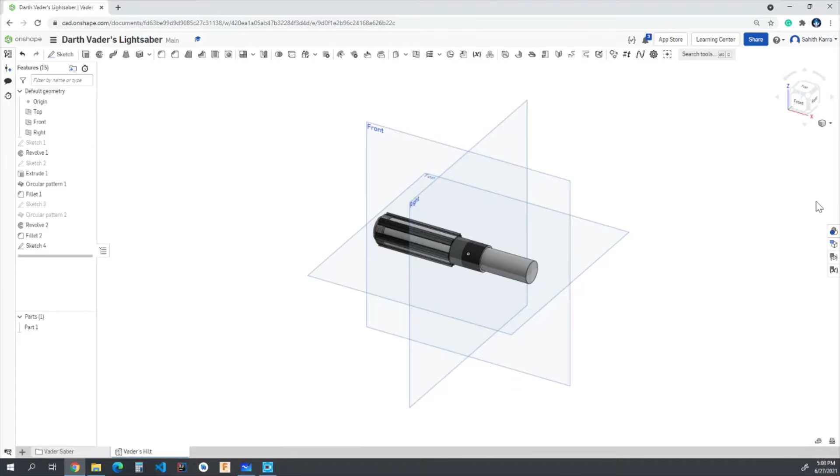We're going to come on over to the front view and create a new sketch right on this front view, and just add a rectangle right at the bottom, right underneath this black section.

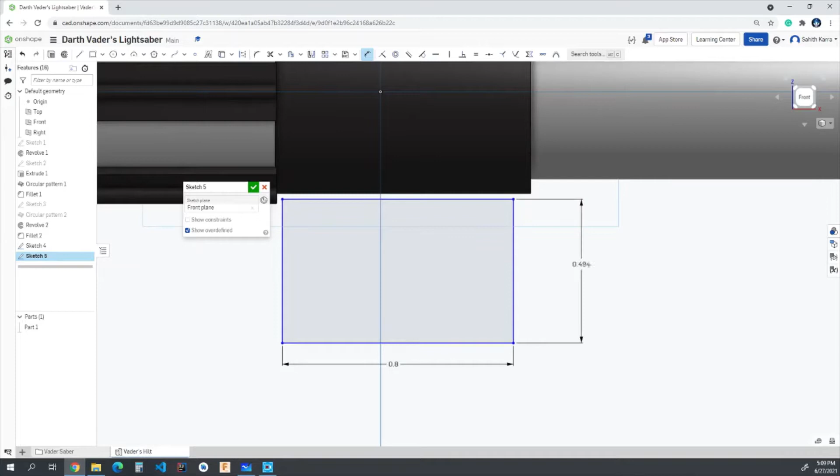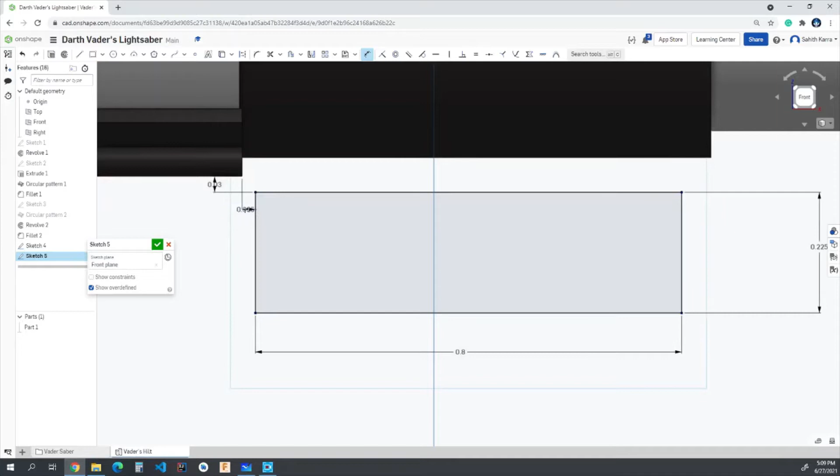We're going to add our dimensions. This bottom edge is going to be 0.8 inches, and this side is going to be 0.225 inches. Then we have to dimension the locations of it. This is going to be just right off of this bottom edge of this little notch over here, 0.03 inches, and then in terms of its horizontal dimension we have to add this in, it's a little weird. This will be 0.025, and just like that we have our little rectangle.

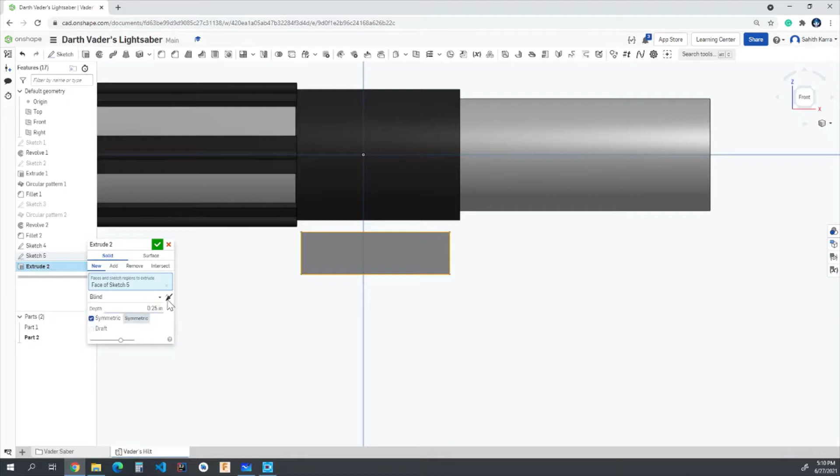Hit OK on our sketch, and we're going to move on to the extrude. We're going to extrude this little rectangle we just created, and the depth is going to be 0.25 inches. Momentarily we're going to be creating a part 2, but we'll deal with that in a sec. Make sure you have symmetric clicked, and once you're done with all that, hit OK.

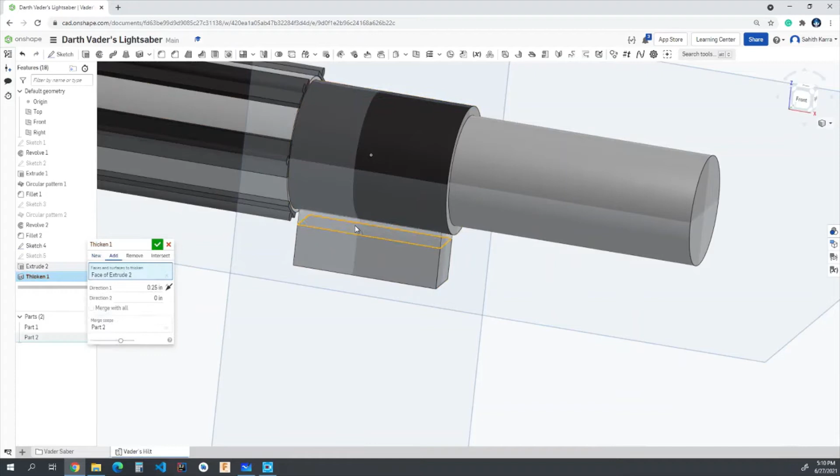So basically what we're going to be doing is creating a little handle for Darth Vader's lightsaber. We momentarily created a second part, which is just this rectangular prism, but we want to add this little bottom face and attach it to the top part. We're going to do that by thickening it so it attaches back, and we want to merge it with everything. Once we've done that, it makes sure this part is now attached to part 1. I'm going to hit OK.

For both of these little extrudes and thickens, I'm going to add an appearance and make it the custom black color that we created in part 1. I'm going to hit OK, and like that we've added this little second part.

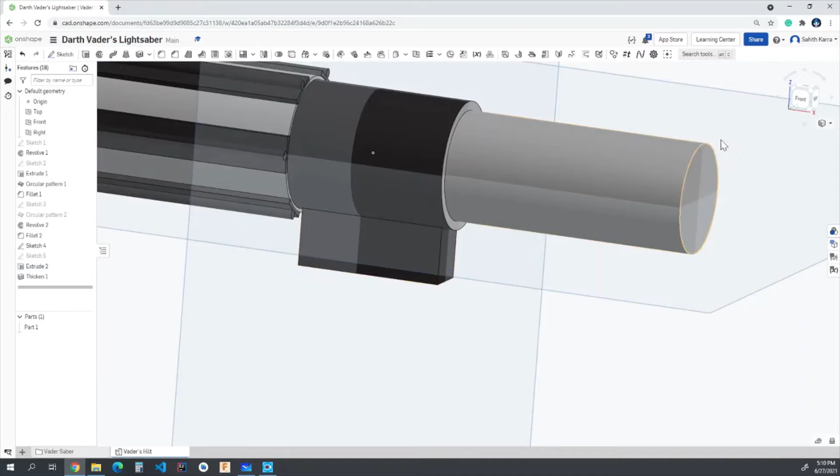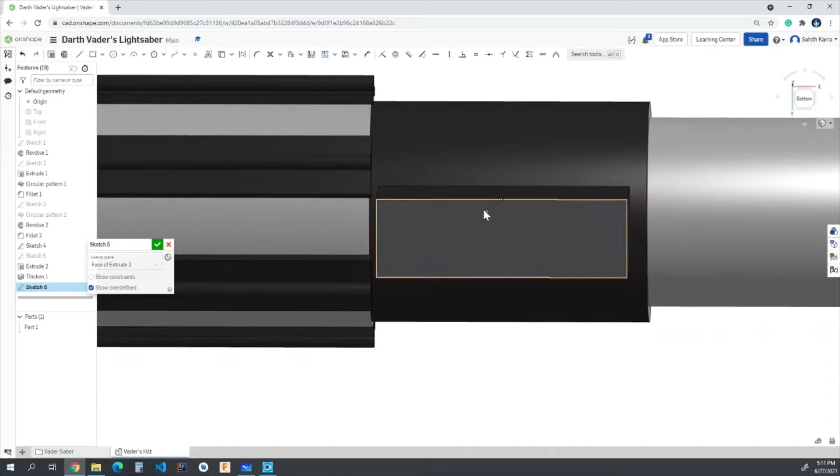Then we're going to come on over to the bottom of this handle. I'm going to hit P on my keyboard to make all the planes disappear again. I'm on the bottom now, and we're going to add some circles, some buttons and other details to this handle, because right now it's kind of boring, so we got to add a little bit of detail to it. I'm going to do it on the bottom part of this rectangular prism, and add a few circles to it.

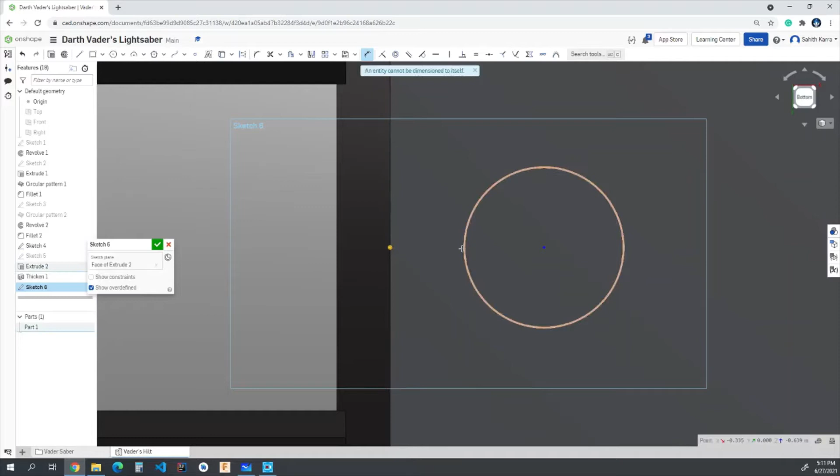First I'm just going to start off with one, making sure it's aligned with the midpoint, and add that circle in right there. Let's move this out real quick so we can dimension it a little better. Let's dimension this like so. This is going to be 0.01 inches—right, and that just blew up, so let's go ahead and change this to 0.115 inches. Alright, and that's exactly what we're looking for.

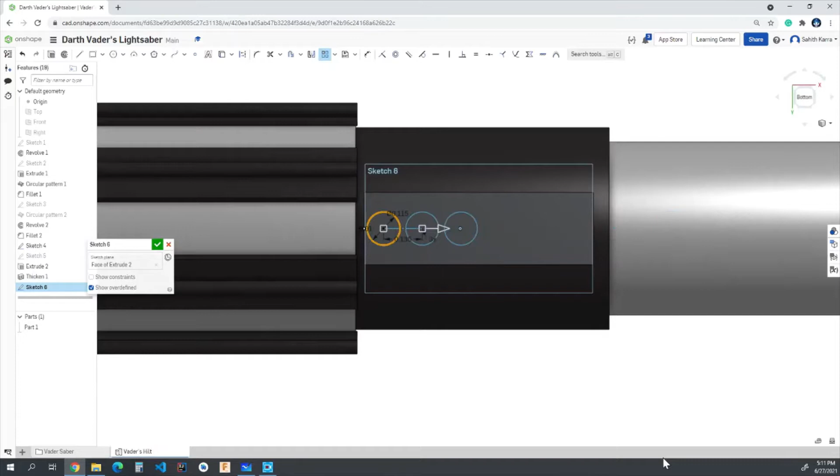Hit OK. Now we have to make these buttons—right now they're just circles. We have to make these 3D objects, and the perfect way to do that is through an extrude. So I'm going to extrude sketch 6, and we're going to move this up 0.03 inches.

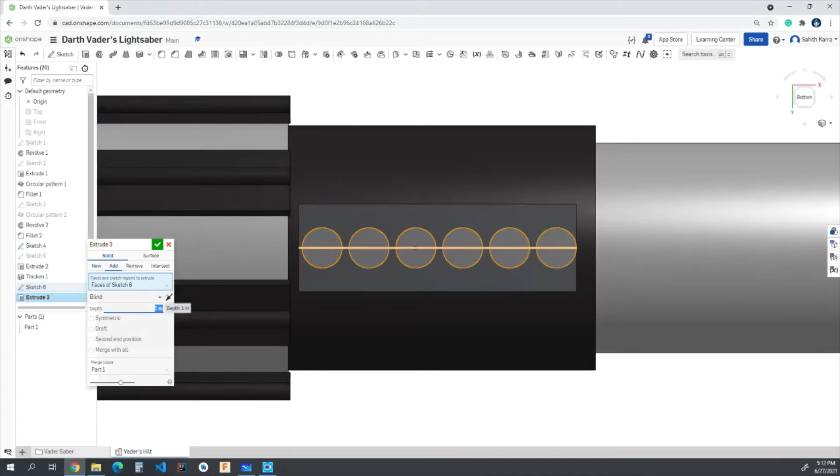And like that, we have 6 little buttons right there. But they're kind of sharp. We want to make these more smooth, and the perfect way to do that is through fillets.

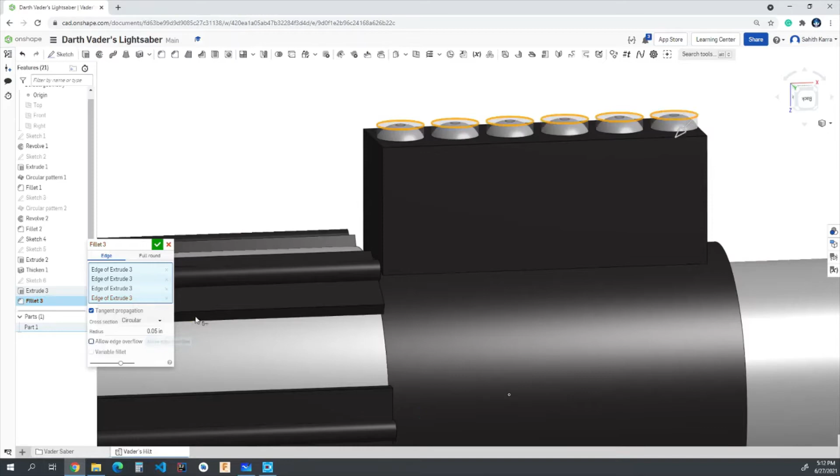I'm going to hit all of these little edges on the top of our buttons. For a second it's going to show up as red, but we'll fix that. We want these fillets to be 0.05 inches, and we want to remove allow edge overflow, which should fix all our errors. Now we've got 6 round buttons, and that looks pretty good.

Now we're going to come over to the front view and add the final notch on our handle. That's going to happen on this little front part of the handle that we created. I'm going to come over to the circle tool and align to the center.

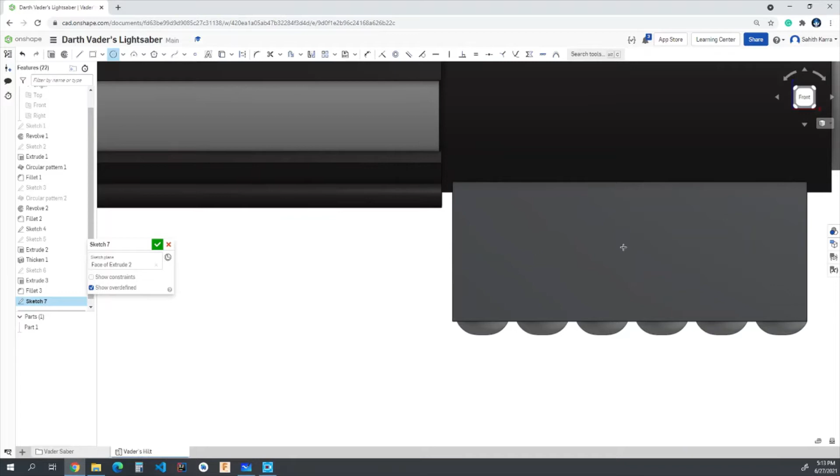Onshape makes this easy for us. We're just going to hover over the top part until we see the midpoint, hover over here until we see the midpoint, then drag over, and Onshape will know we're looking for the center by highlighting the 2 things in orange. I'm going to create a first circle, 0.1 inches, and a second circle, 0.15 inches, and like that we have 2 circles.

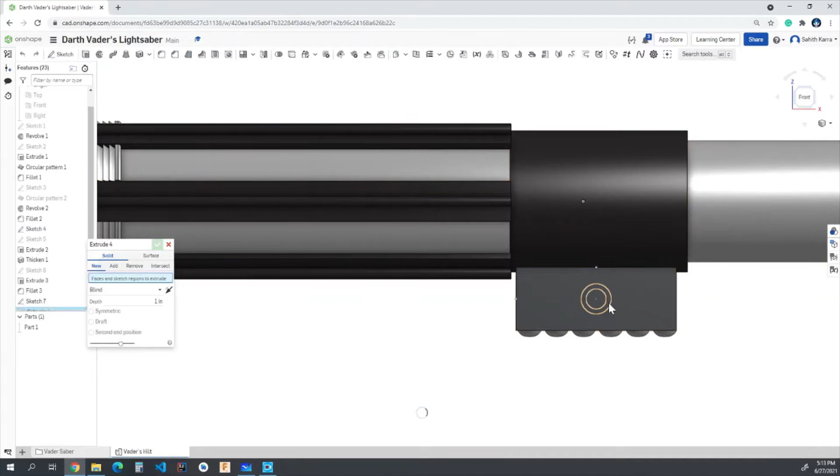They're going to be the blueprints of our notch. I'm going to hit OK and move on. Then I'm going to extrude this outer ring of our two circles, this outer section, 0.25 inches. Once we've got that, that's our little outer circle for our notch.

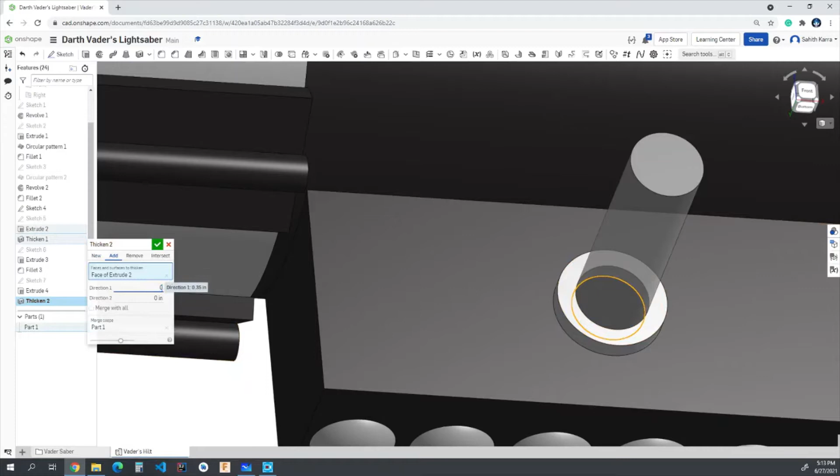Now we want to do the middle section. I'm just going to hit thicken on that little center section. Let's make this, instead of 0.35, 0.15 inches. Hit OK, and now we're almost done with our notch.

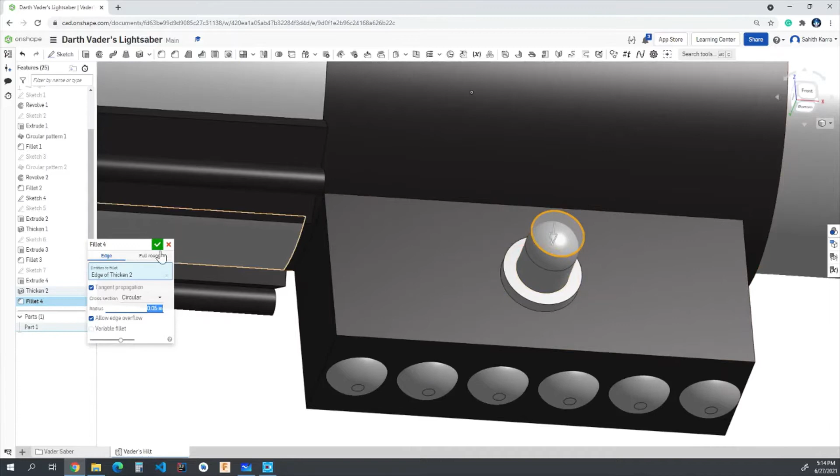Once again, we just have to make the top part smooth with a fillet. We're going to hit that top section and add a fillet of 0.05 inches. And like that, we just smooth it all around and create a really nice looking notch. With that, we've added our middle section details to Darth Vader's lightsaber.

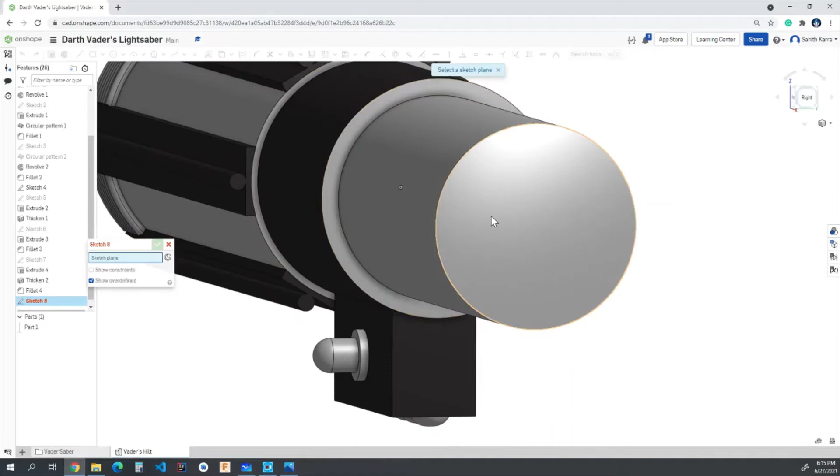Alright, now let's begin working on some of the upper details to Darth Vader's lightsaber. First I'm going to come over to the right view and start a sketch right on this upper circle. I'm going to start with a circle right off of the origin, and let's make this 0.85 inches.

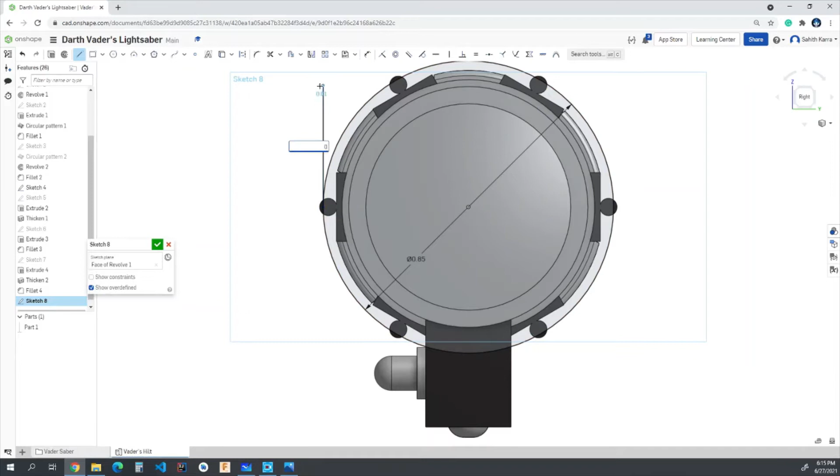Once we've got that, we're going to come over with the line tool, and we just want a nice line tangent to the circle. Let's make this 0.5 inches, and repeat the same thing on the other side, just tangent to the circle, 0.5 inches.

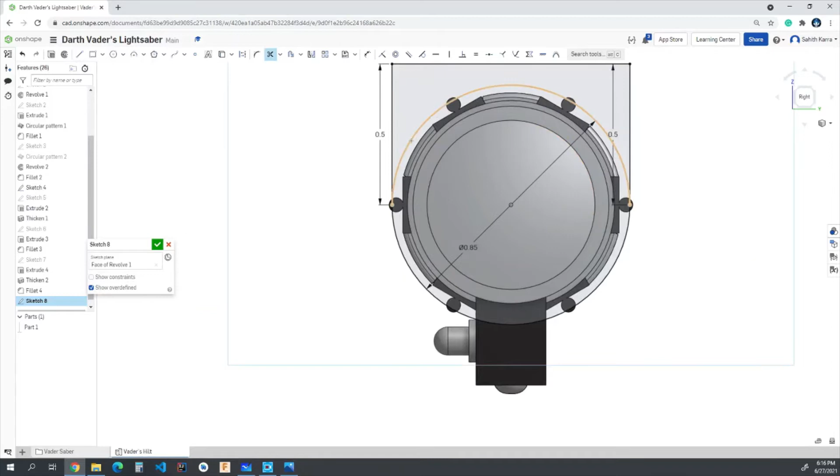Let's connect these two lines with a line that's 0.85 inches long. Then I'm going to come over to the trim tool and just trim the top part of the circle until we have this nice shape over here. I'm going to hit OK on that sketch, and then we're going to extrude this sketch that we just created.

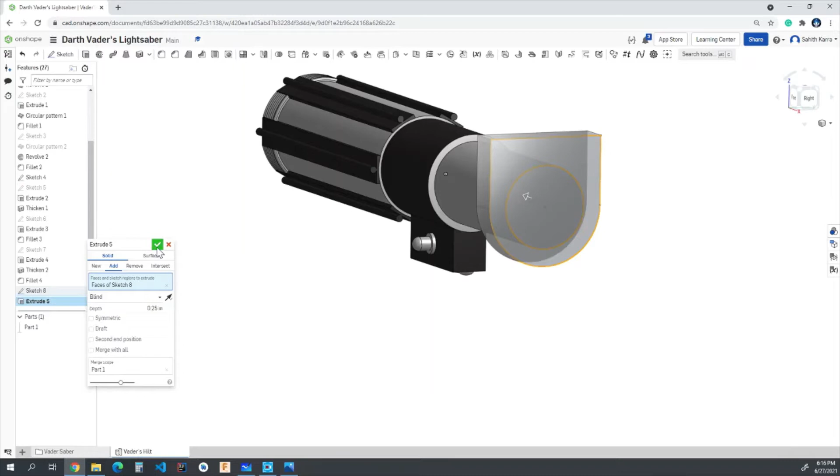Let me go ahead and click on the sketch instead. Alright, but instead of up, let's go down, and instead of 1 inch, let's make this 0.25 inches downward. Once I do that, I'm going to add an appearance to the feature, making this a custom black color. Now we have the top part of our lightsaber almost complete.

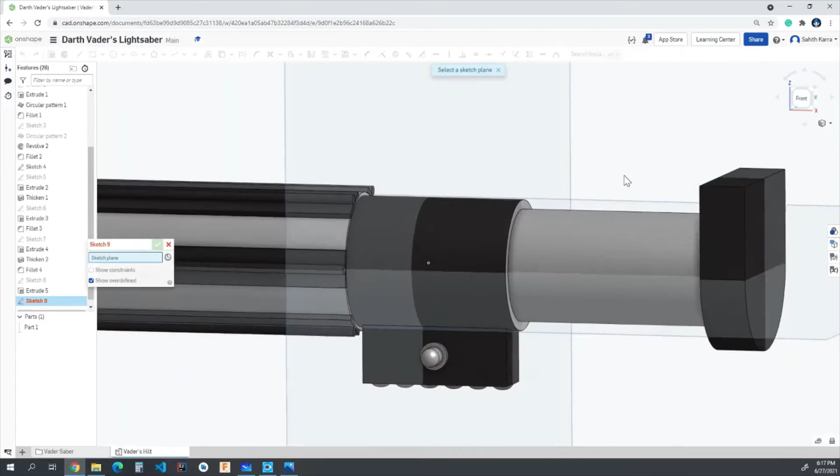I'm going to come over to the front view. I'll go ahead and add my planes back by hitting P. Now I'm going to start a sketch on the front view—or actually, instead of on the front view, let's do it right here, it'll make it easier. Right on this little face, where we created this rectangular kind of shape attached to the semicircle, we're going to create a sketch on that face.

Then we're going to create a rectangle. Let's hit the rectangle tool and start off from this bottom corner, and start up—so let's retry that rectangle. Let's actually start from this top corner and work down, making sure this is a corner rectangle. Let's start up over here and make this rectangle again. The first dimension should be 0.225 inches, and the second one should be 0.3 inches.

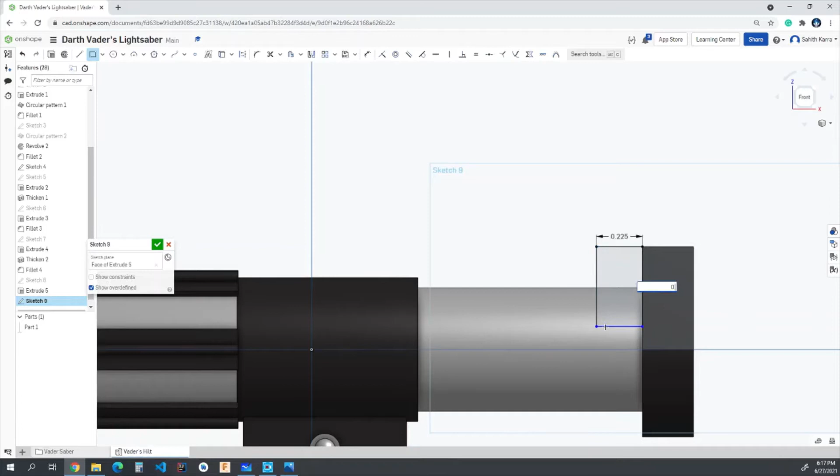Now once we have that rectangle, I'm going to come over to this—should be the 3-point arc, that's the one. We'll start off from this bottom corner and move our way to the top corner, or not top corner, but the corner over here. And let's make this 0.2 inches.

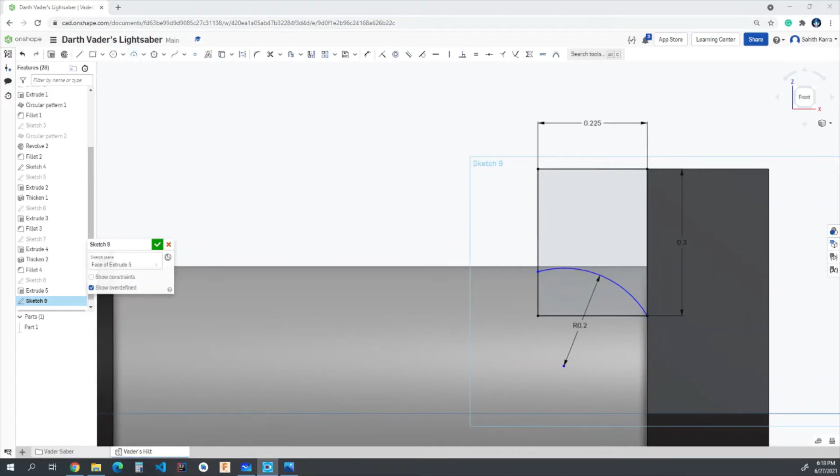Alright, let's go ahead and make this dimension 0.225 inches. Perfect. Now we're going to hit OK on this sketch, and come on over to extrude. We're going to extrude this face backward again, and let's add this to part 1 by merging with part 1.

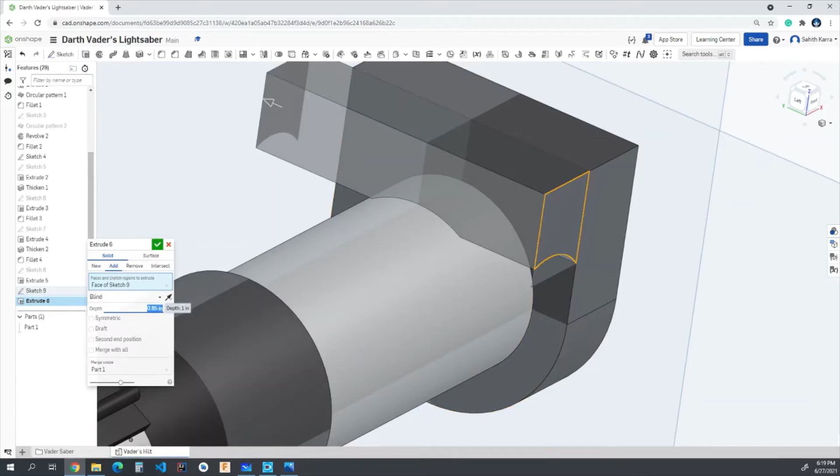This extrude should be 0.85 inches long, just the same length as before. Hit OK, and that's already black, so that's perfect. Let's lose the planes again, and now we have this little other section of our lightsaber. It looks pretty good so far.

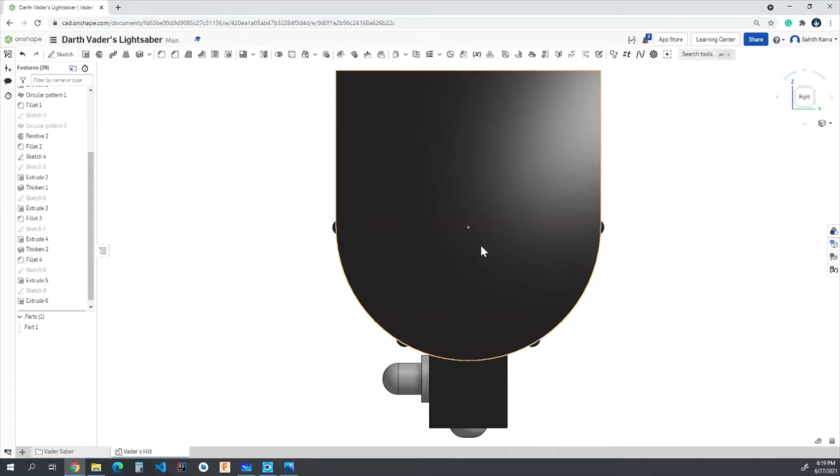Now I'm going to come back onto the top, hit right on this little cube, and come over to the top of our lightsaber. I'm going to start a new sketch right on that top plane, and once again come over with 2 circles starting from the origin. First one is going to be 0.675 inches, and the second one is going to be 0.725 inches. Once that's good, I'll hit OK.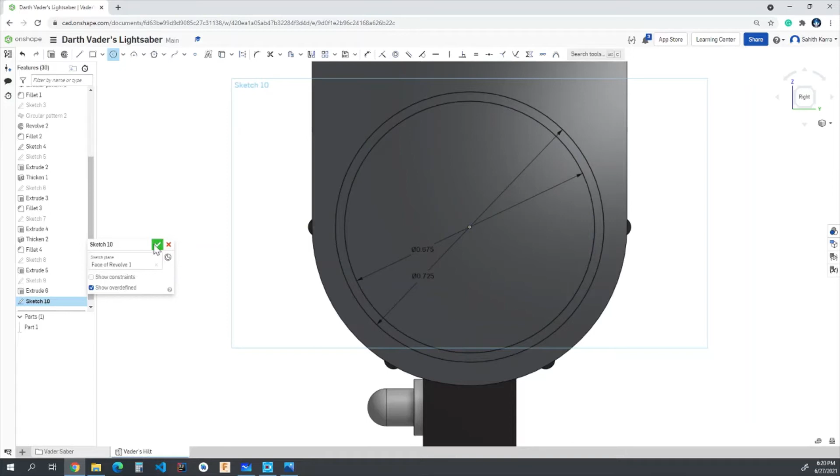We'll go ahead and extrude this outer ring section 0.85 inches. Hit OK. We have this nice little ring coming out. Let's also make this black, so I'm going to add an appearance to this feature and make it black in color. Hit OK.

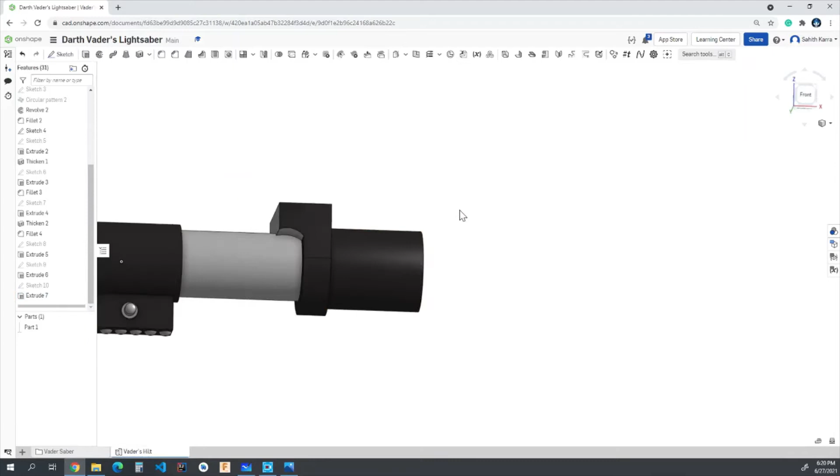Now in Darth Vader's lightsaber, we have this top part cut off, kind of a semi-cylindrical shape. So we're going to come over to the front view, and that's exactly what we're going to try doing. I'll add our planes back in, and create a new sketch on the front plane, right in the center of our little lightsaber.

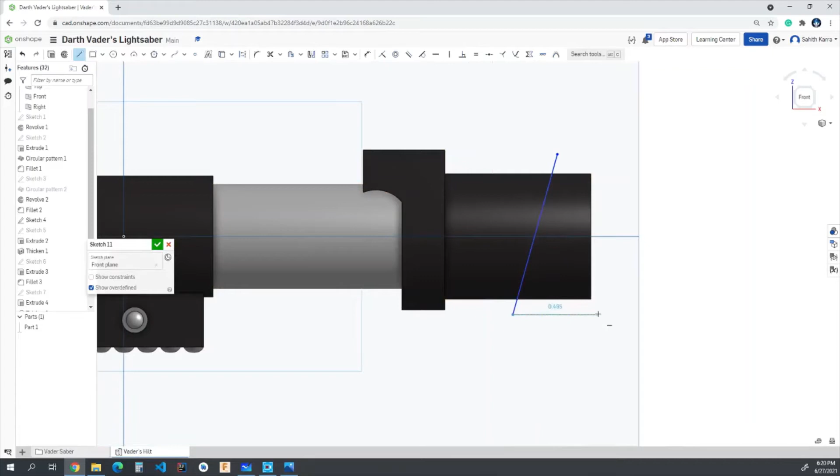This part involves a bit more guesswork. I'm just going to create a trapezoidal shape, a general shape, and then add some dimensions in later. Let's go ahead and Control Z, and create a new line right between these two figures. I want to make this line horizontal, and this line that's already horizontal.

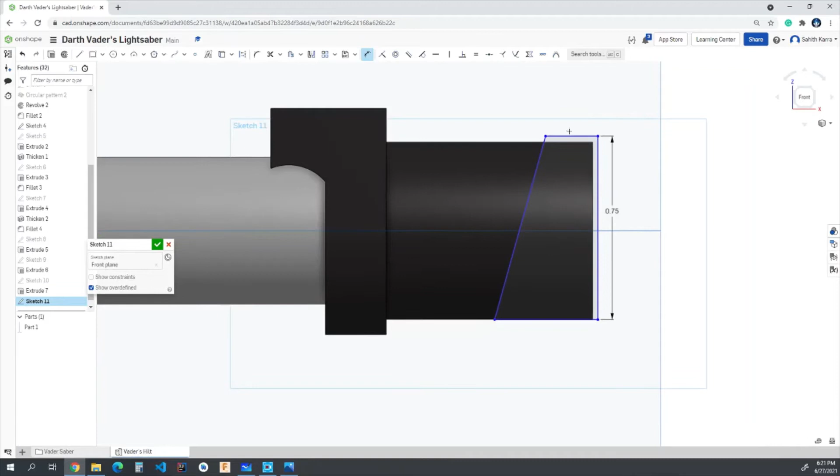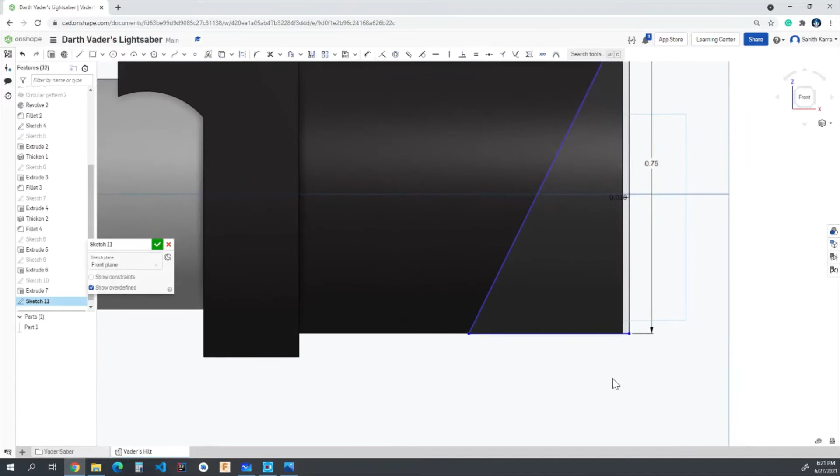Now let's add some of our dimensions. This should be 0.75 inches. This should be 0.05 inches. Now we want to add a dimension before it gets a little too sticky. Let's make this 0.018 inches. And since it's now below, let's make this negative to make that line above it. Then let's make this dimension over here 0.55 inches.

Now we want some of this line underneath too, right? So I'm just going to move this over, making it easier to dimension until we find that it's nice and equal on both sides. That looks about good.

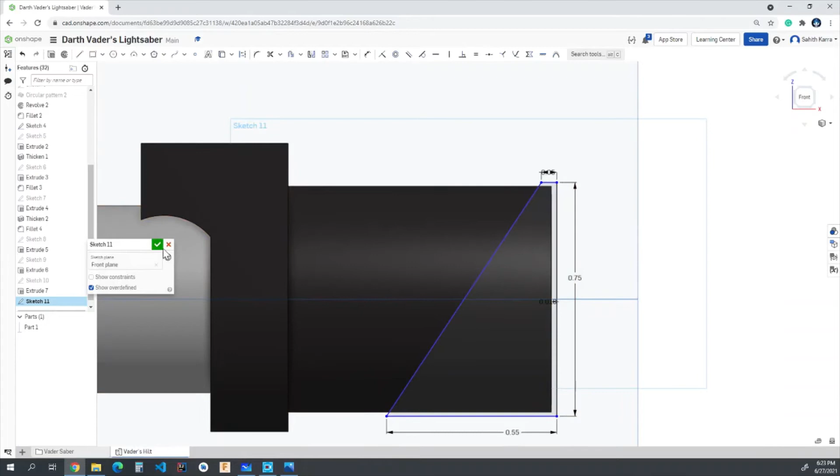I'm going to hit OK on the sketch, and now extrude this sketch, but we're going to be cutting, so let's go to remove. Looks like it didn't select - that's the face, and we're going to make this symmetric. Instead of blind, we'll make this through all. Once we do that, we have this top section removed.

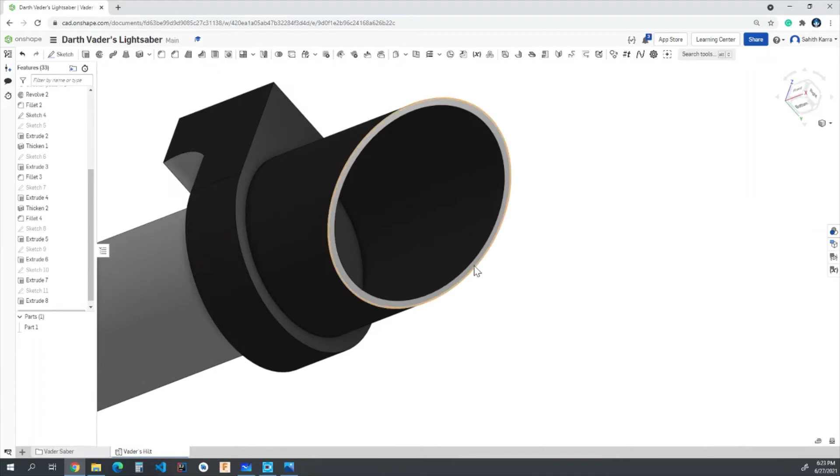Let's go ahead and lose the planes, and I'll add an appearance on this face real quick, just on this little top section, and make this the custom black color so it matches in with the rest. And like that, we've added that little top section for Darth Vader's lightsaber.

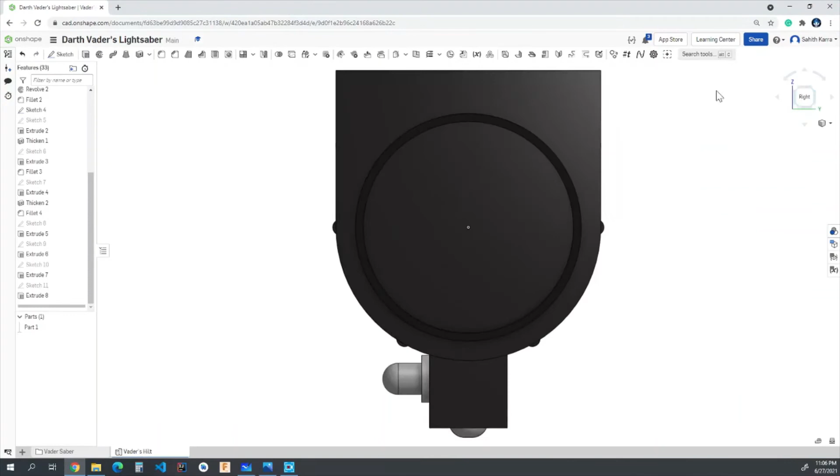Alright, so we've gone ahead and added some of the major parts for the top, but now we have to add some details to it, because right now it's a little bit boring. So I'm going to come on over to the right view, which is technically the top of our lightsaber, and create a new sketch on this face right over here. I'm going to start off with a rectangle, and I'm not going to attach it to any sides. I'm just going to create it in the middle, and I want the midpoint of this rectangle to match up with the midpoint of this line over here.

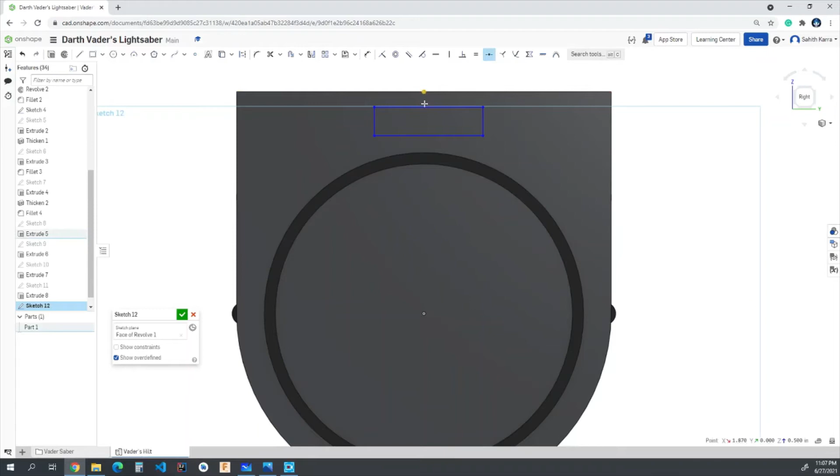So I'm going to click on midpoint, find the midpoint over here on the top line, and then click on this edge, and just like that the two midpoints match up. Now we can go ahead and add dimensions. I want this to be 0.3 inches and this to be 0.4 inches.

And we want this rectangle to cut into this little cylindrical shape. Not fully, but just a little bit it wants to cut in. So we have this rectangular shape that will ride on the outside. I'll show you what this means in a little bit.

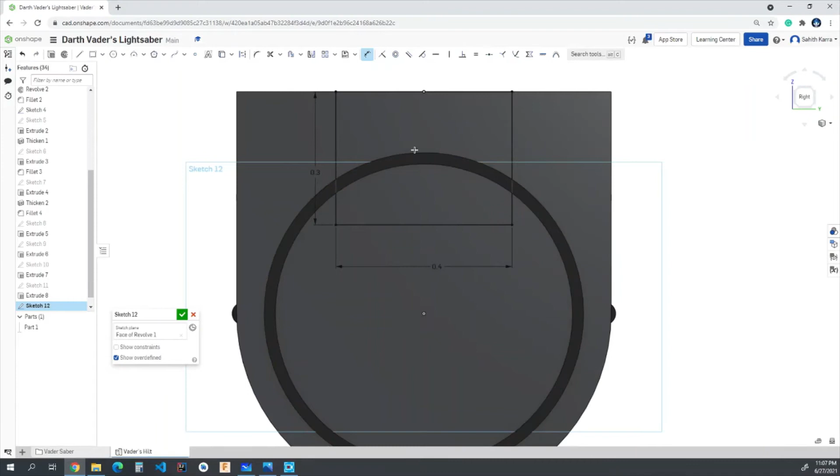So we have this shape now, and we're going to go ahead and extrude just the outside face, not whatever cuts in, just the outside face, 0.3 inches. Once we've done that, we can hit OK. And just like that, we have this rectangular shape that rides on the outside of this cylindrical shape.

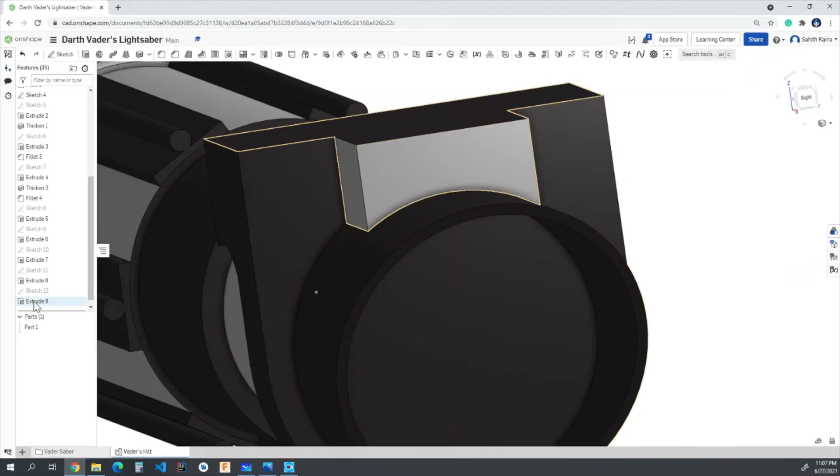I'm going to go ahead and add appearance to this feature and make it this custom black color, so everything is black. Perfect. Now that we've done that, we can move on to this little face, and add some of the buttons that make Darth Vader's lightsaber Darth Vader's lightsaber.

So I'm going to create a sketch on this face right over here, and we're going to create two circles. This first one is going to be the center of rectangle number 1, and we'll call this rectangle number 2. So the first circle will be in the center, and we can use the midpoints of the two lines on the outside and find the center.

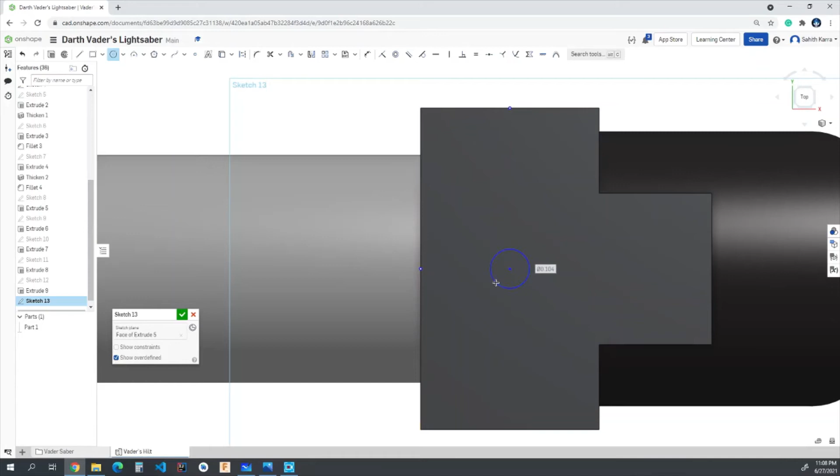Onshape will tell us where that is, and we're going to make this 0.15 inches in radius. Then we're going to find this one, and this one will be 0.075 inches. Right, and so that's just the bottom of our two buttons.

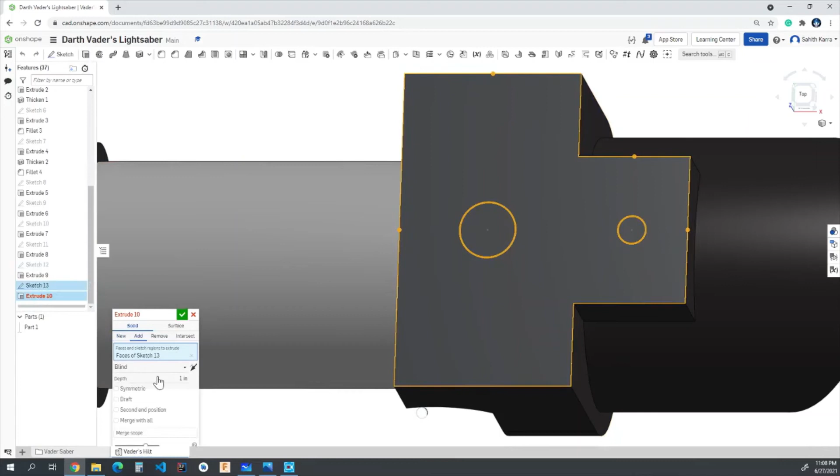So we've gone ahead and done that. Then I'm going to extrude our sketch 13, which is our two little circles over there, and we're going to extrude them 0.05 inches. Then we're going to create two more circles on top of these for the top parts of our buttons.

So I'm going to create a sketch on one of these cylinders, and come on over to the circle tool again, and we're going to create a circle which is 0.2 inches, and then create another one over here. This one is going to be 0.125 inches. All right, perfect.

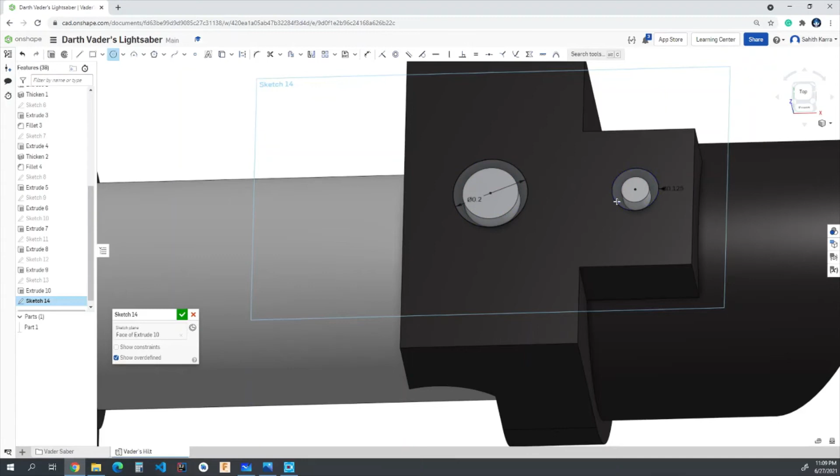And then I'm going to come on over once again to the extrude, and extrude this outside and the inside part just to get a nice little cylinder, a bigger one on top, and this one is going to be 0.05 again. Hit OK, and then we're going to go ahead and extrude.

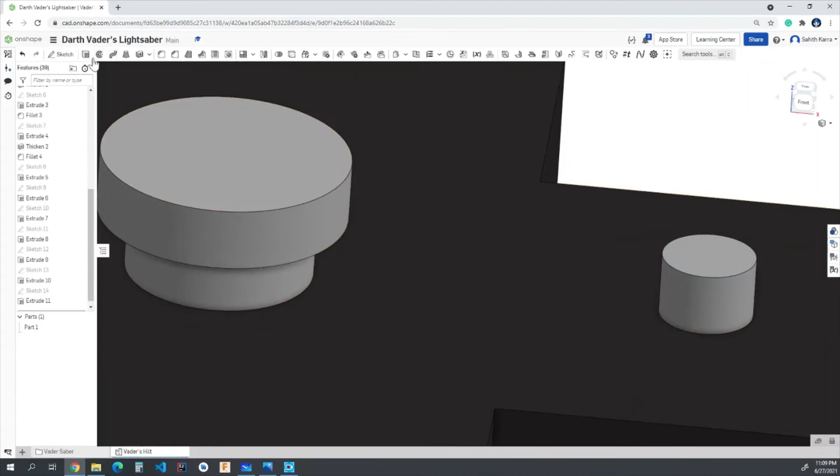Let's go and show sketch 14, which had our circles. We're going to extrude this one, and this will be 0.025 inches. Let's wait for that to load. Perfect. Now we have our two little buttons, and we can go ahead.

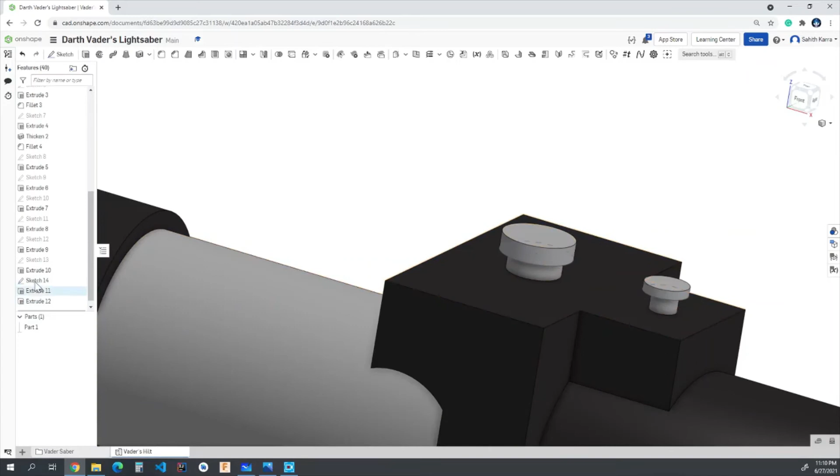Let's go ahead and hide sketch 14, and now we can smooth some of these edges off with the fillet tool. So I'm going to come on with the fillet tool, and choose this bottom edge for both of our buttons, and we're going to add a fillet of 0.01 inches.

That's good. And then we're going to add another fillet on the bottom section of the top section of our first button, right over here on that edge, and we're going to create that fillet to be 0.05 inches.

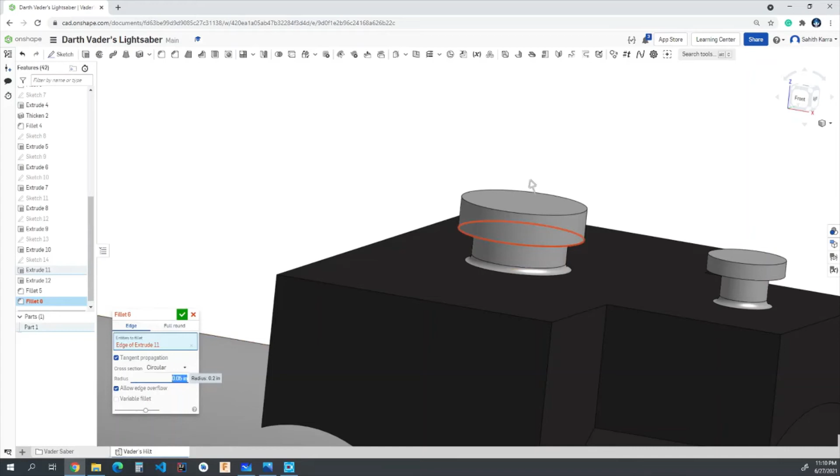Perfect, and that rounds off that bottom edge. Now we're going to create a fillet in a different location from the other one, on the outside face over here. This fillet is going to be 0.0125 inches.

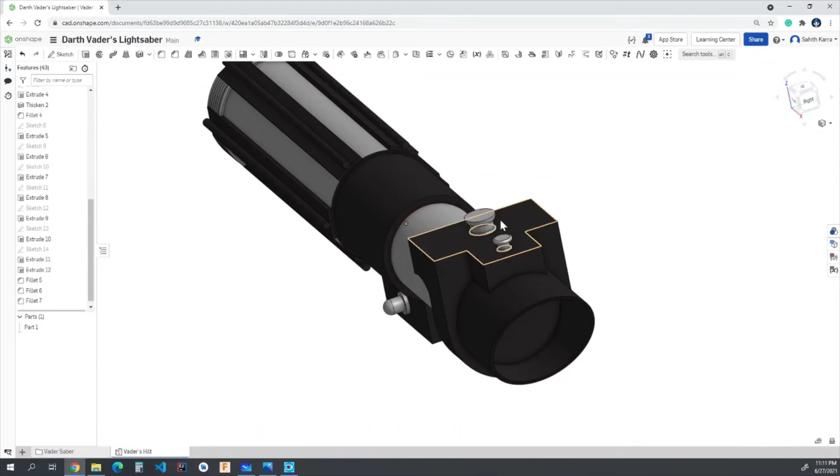And just like that, we created a few buttons for Darth Vader's lightsaber and this really cool little rectangular piece. In the next section, we're going to add the outer ring for Darth Vader's lightsaber.

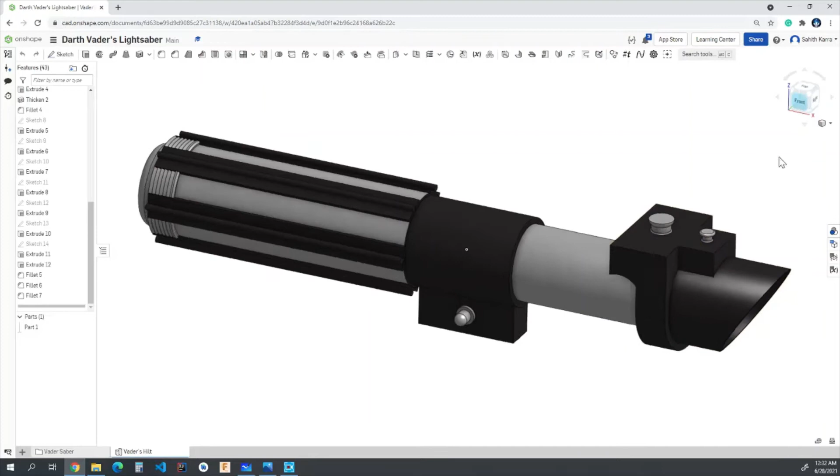Okay, so now we are on the final part of making this hilt. All we have to do is add a little ring to the top of this section right over here. So we're going to come over to the front view and add a circle here first, to create the area where the ring will fit into the hole.

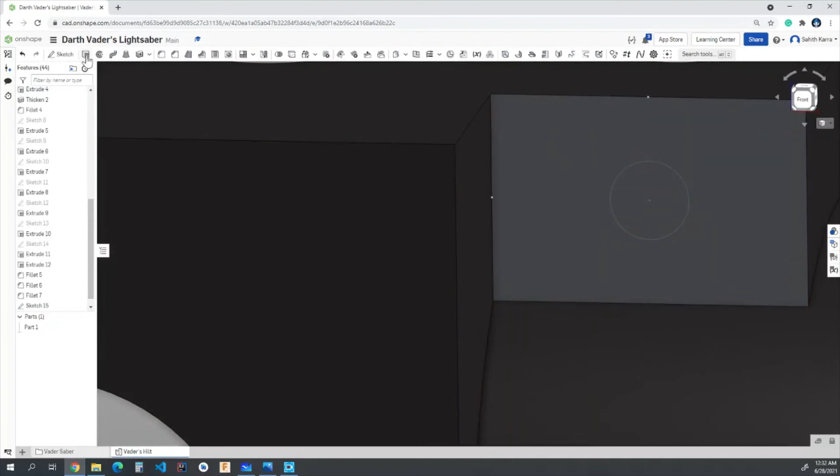I'm going to come over to the circle tool and find the center of this little rectangle and create a circle with a radius of 0.075 inches. Hit OK. Then I'm going to go and remove this little circle from it, and 1 inch sounds good.

I'm not really putting a dimension because I just want it to go all the way through. We can just go through all for right now. So this is going to go through the entire block.

Just go back on that. That should just be right over there. Perfect. I'm going to go ahead and hit OK. I don't know why this is coming so many times.

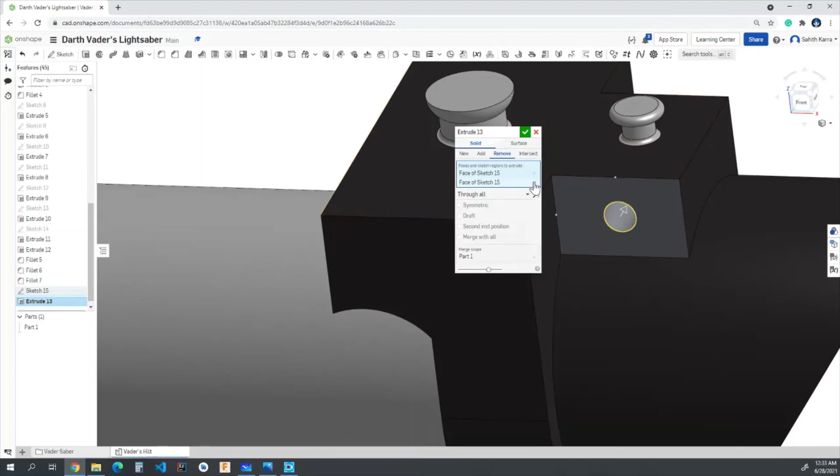Perfect. Now that we've got the hole, I'm going to go ahead and add the center points of both of these circles, which will make it easier when we add our plane, which I'll explain in a second. So for right now, we're going to go to sketch off of this circle right here.

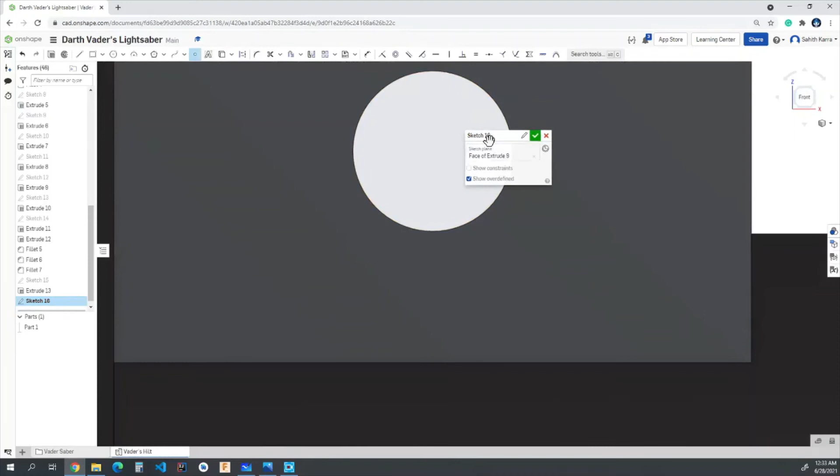I'm going to come to this point right here, and I'm just going to mark the center of this circle right there. Perfect. I'm going to hit OK, and then I'll do the same thing on the other side for this circle here.

I'm going to come over to the back. I'm going to add a sketch, and point right where the circle is, and it's going to be in the same location because the centers are going to be on the same point on both sides. I'm going to hit OK over there, and that should be good.

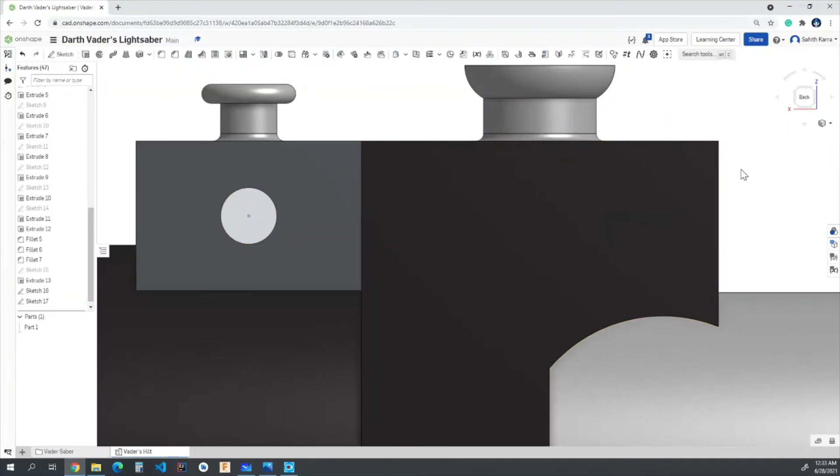I'm going to come back to the front view now, and we're going to create a plane that goes through this rectangular prism, which will make it easier to create our sweep path for our ring. So I'm going to come over to the front, over to this plane icon, and instead of offset, we're going to do plane point.

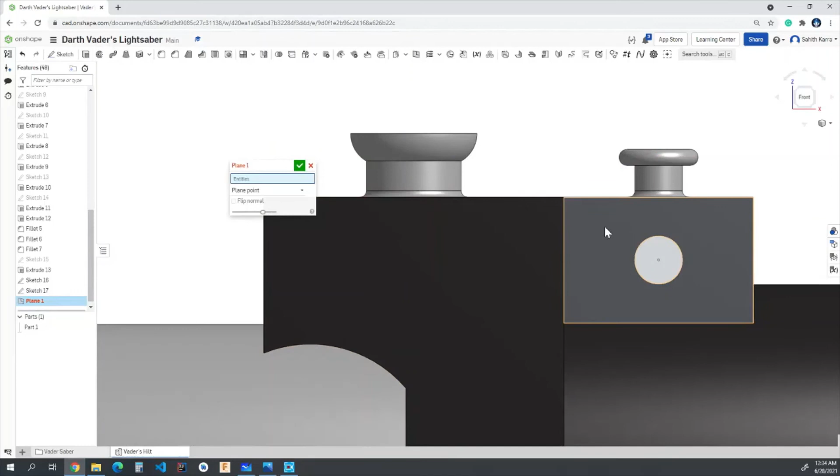I'm going to hit P on my keyboard to bring back the planes, and you'll see why in a sec. For a plane point, it takes two parameters, a point and a plane. That's why we have the center point, so that's going to be my point.

And then for my plane, I'm going to choose the top plane. All right, those are our two parameters. And then I'm going to hit P on my keyboard again to hide everything else.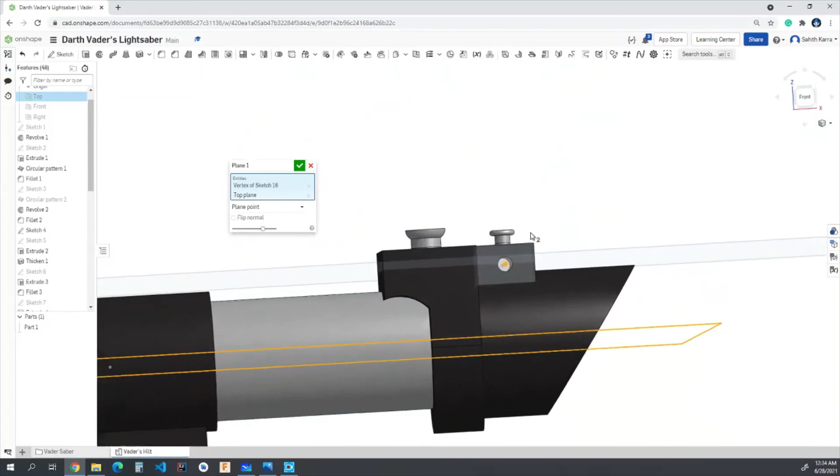And now we'll have a plane cutting through this circle right here. I'm going to hit OK. And now we have our plane. I can show it again just for right now.

Now that we've added our plane through there, we can draw the sweep path for our ring. So I'm going to come over to the top view and create a sketch on that plane one that we just created.

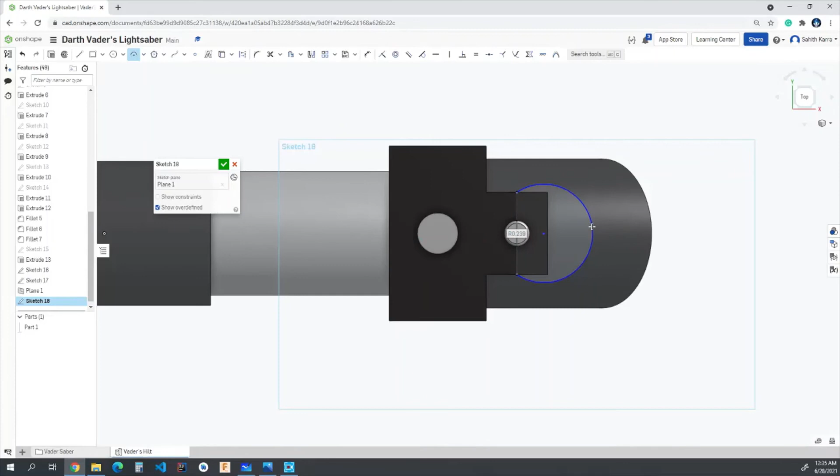I'm going to come on over to the line tool and create a line between these two points. That looks good. Now I'll go to the 3-point arc tool, starting on the top point and then coming over to the bottom, with an arbitrary radius for now. I'll add a dimension of 0.275 inches. That looks perfect, so I'll hit OK.

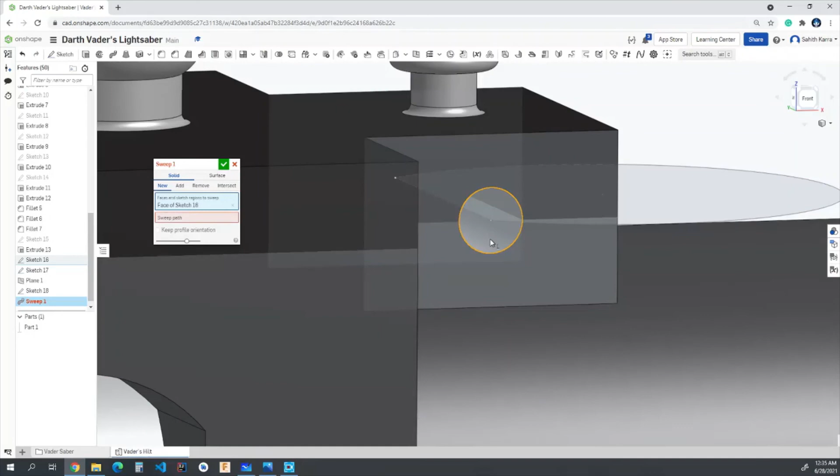Now for our sweep, I'm going to come over to the sweep tool. For the face, I'll choose the face by our center, the circle from before. That worked to create the hole in our block, and we can also use it as the face for our sweep. For the sweep path, I'm going to choose this line and this semicircle. Once I've done that, I'll hit OK.

Now we have this little ring. I'm going to edit the appearance and make sure it's that gray color from before. I'll hit OK, and now we have this little ring up here.

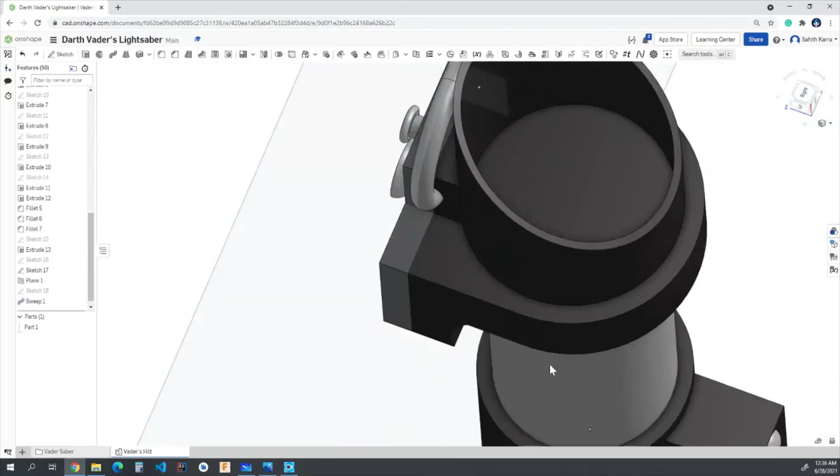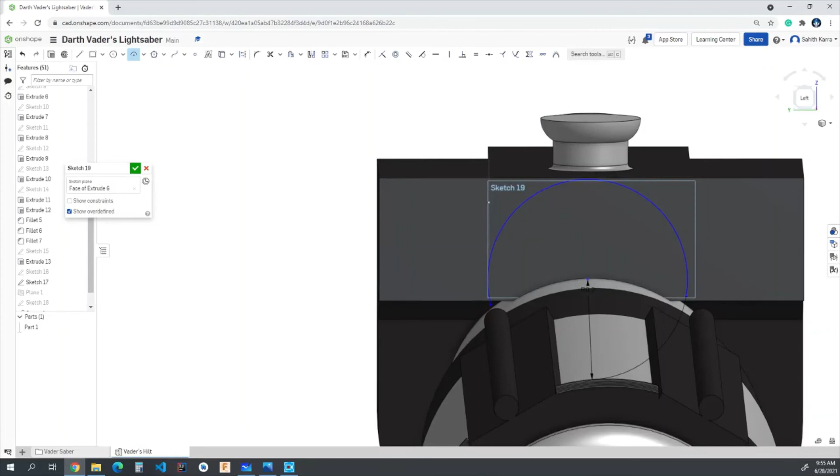Now we're going to come over here. I'll hit sketch on this back face and angle it so we can see this bottom section. Then I'll use the 3-point arc tool to create an arc like this. For the radius, let's go with 0.2. It looks a little big, but we can dimension it accordingly.

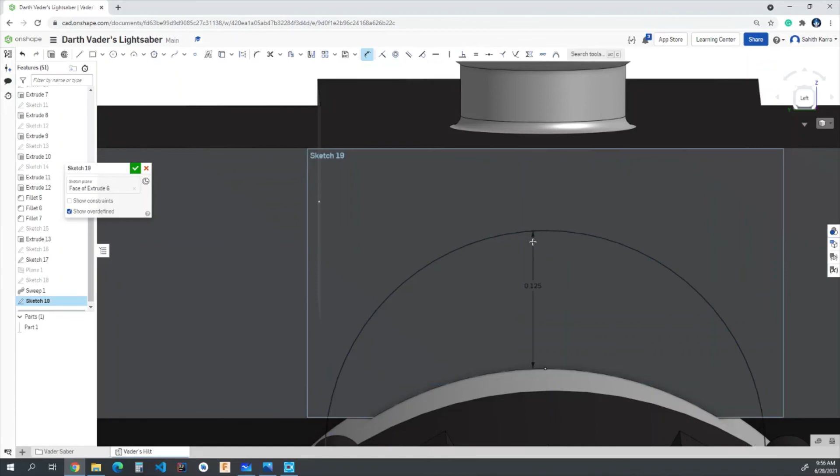So we want this midpoint to be aligned with the midpoint of this arc over here. I'll hit escape, find the midpoint, hit vertical, and align it with this midpoint so that lines up. Then from this midpoint to here, I want that to be 0.125. Finally, this to this should have a horizontal dimension of 0.2, and this to this should also have a horizontal dimension of 0.2. Now that's looking pretty good.

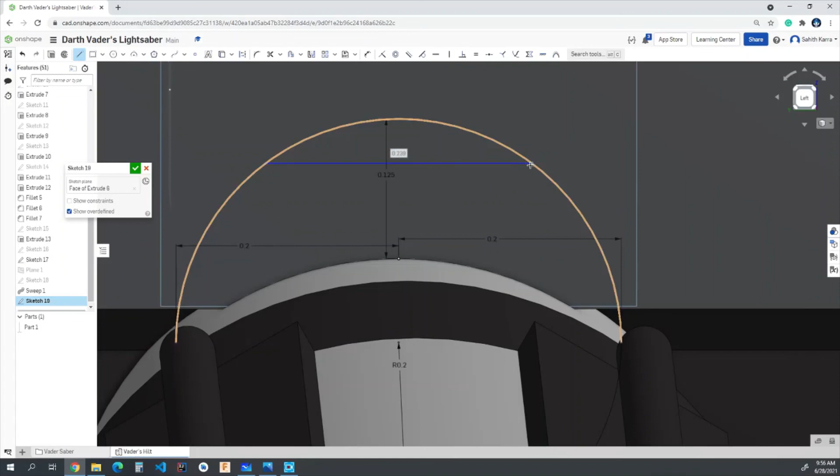Now let's go ahead and add a line from here to here, making sure it's perfectly horizontal and touches the edges of this 3-point arc. Let's make this 0.2. Perfect, now we have our shape. We're going to be extruding just this outer thing and this face as well, which is the face we'll extrude to add our next detail.

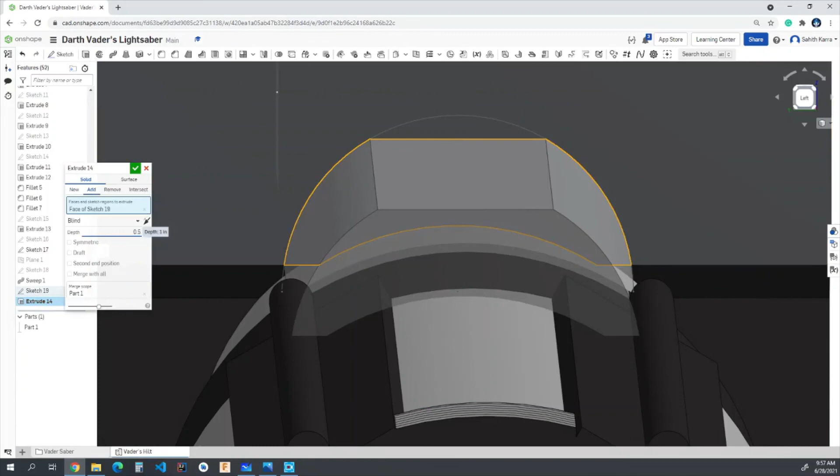I'm going to hit OK on that sketch. Then I'll go to extrude and extrude that face 0.525 inches. Once I do that, I'll hit OK and quickly add appearance to this, making it this custom black color. Then I'll zoom out, and that looks pretty good.

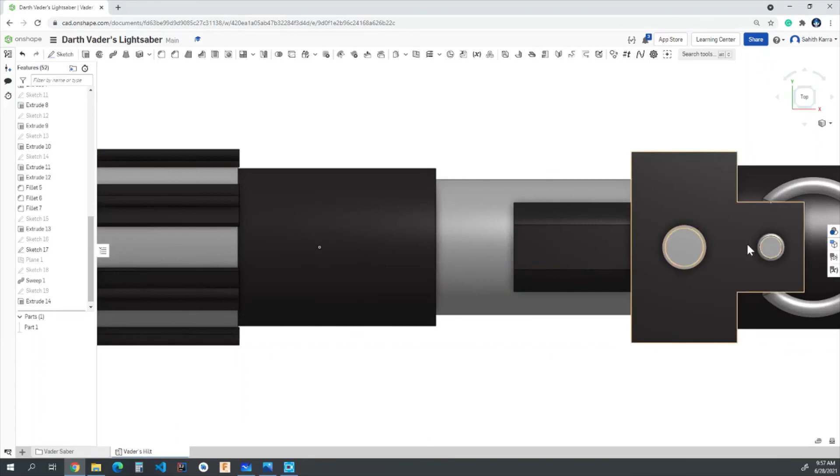Now we're going to add the final button, the one that will activate the lightsaber. I'll come over to the top view and add the button on this flat face. I'll sketch on this flat face and make two circles, one over here and one with the same center point but a bit bigger. I'm going to dimension this 0.12 inches from there. The internal ring should be 0.125 inches, and the external one should be 0.175 inches.

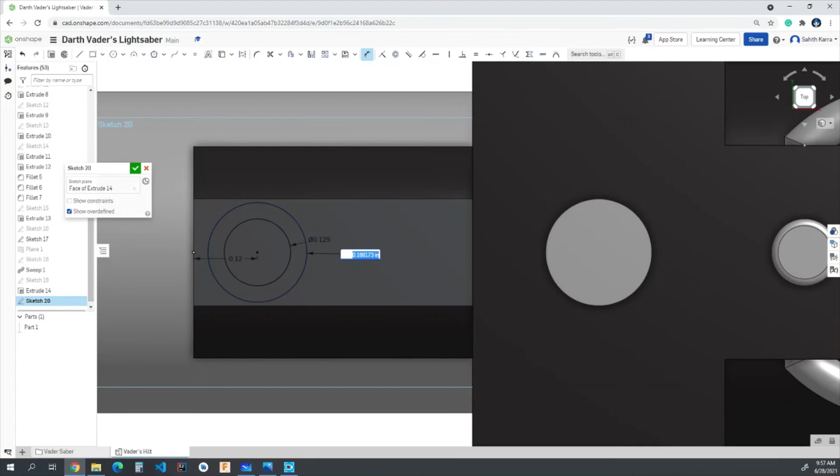Once we've done that, we can go ahead and extrude to make our button. The outer ring will be 0.02 inches in height, and the middle one shall be 0.03 inches. Once we've done that, I'll add appearances to both of these extrudes and make them black. Hit OK.

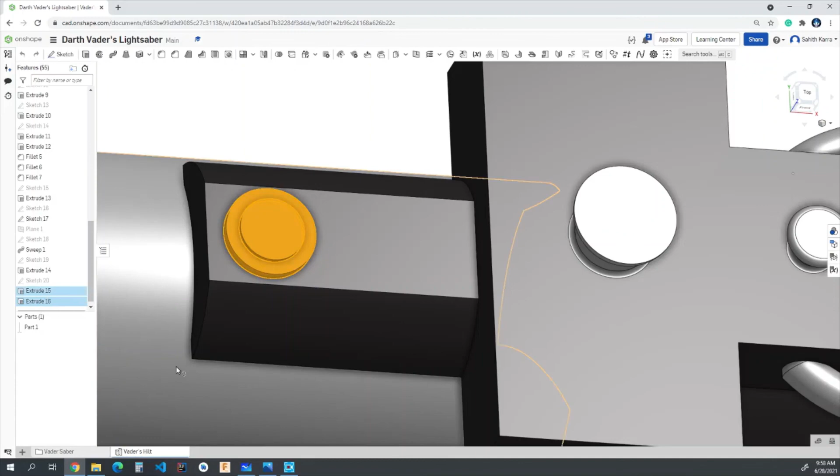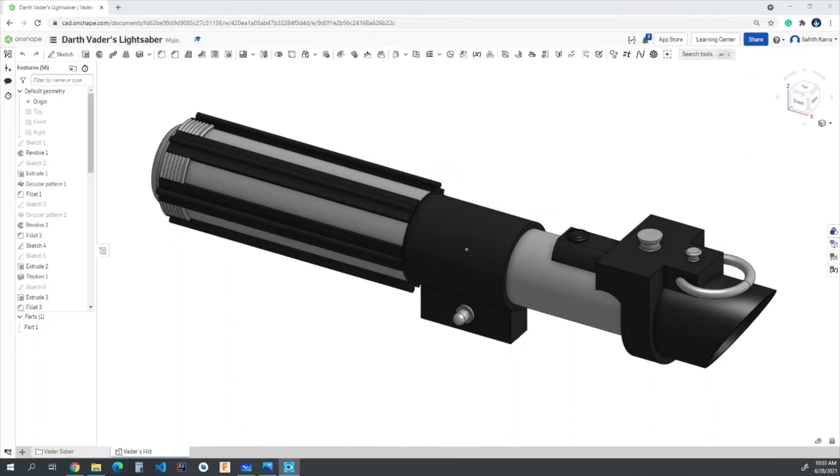Finally, we have one last thing before our lightsaber hilt is all done. Let's go ahead and add a fillet on both of these and round some of these edges, adding a radius of 0.01 inches. This fillet should also be black in color. With that, our lightsaber hilt is finally done, and I gotta say, it looks pretty good.

In the next video, we're going to take this lightsaber hilt and drag it into an assembly, and we'll give it all the features like the retractable blade and things like that. So stay tuned.